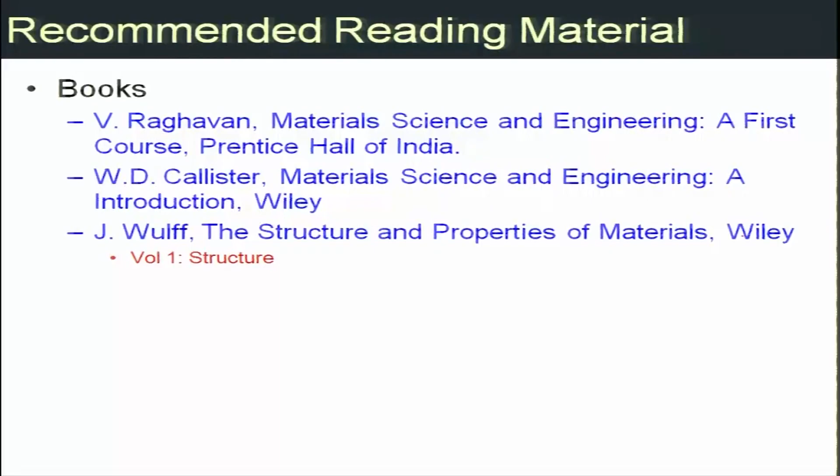It is a very old book, perhaps not available very frequently, but the first volume is related to the structure of materials. It is a very good book if somebody wants to get into a little bit of detail.

Let us see why all of us know that materials are very important. Our civilizations are named after materials, and in the development of humankind, materials have played a very important role, which is why we have ages like the Bronze Age, Stone Age, Iron Age, and so on.

Currently we have the Silicon Age or Electronics Age. So materials are very important; they have been important throughout the history of mankind. It is basically, you can say, the history of materials.

If you go back to our ancestors, they were earlier using stones, and then they started inventing materials. Strangely, precious metals came before many of the materials, followed by development of copper based alloys, various bronzes.

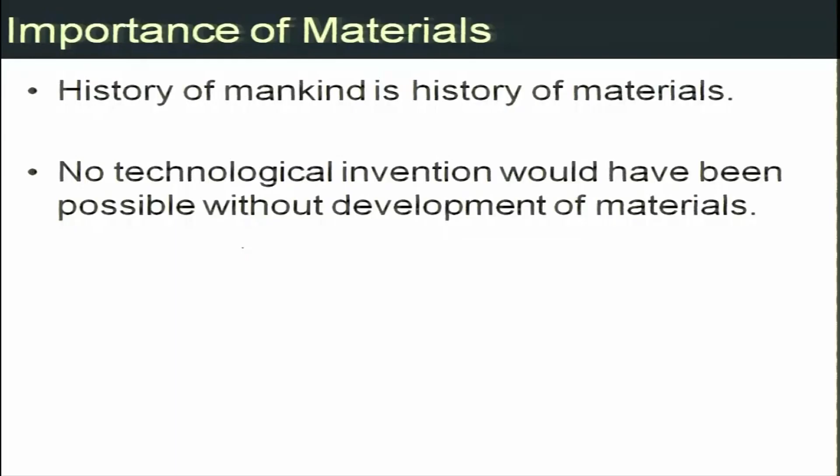If you go back to Indus Valley civilization, you see a lot of bronzes and brasses. And then, of course, the advent of iron gave rise to substantial advantages to human beings, because iron was a stronger material.

It could be used not only in warfare but a lot of other practical things. It made hunting easier as compared to stones and other objects.

If we come closer to our times, since the past 200 years or so, the advent of electronics or electricity has led to new developments.

Materials based on, let's say, the electronic age, silicon based materials, because of which we are utilizing all the devices which are basically silicon based.

As we stand now, perhaps no technological invention would have been possible—all the gadgets, all the technologies, all the healthcare devices, all the automotive devices that we have.

They probably would not have been possible without concurrent development of materials. So materials in that sense are very important for us, and that is why it is important to study the science and engineering of materials.

In this course, which is an introductory course, we will talk about the basics of materials, which will help you advance further in this discipline.

So, if you look at the historical perspective, going back to 10,000 BC, man was using things like stone, straw, brick, wood, and skins.

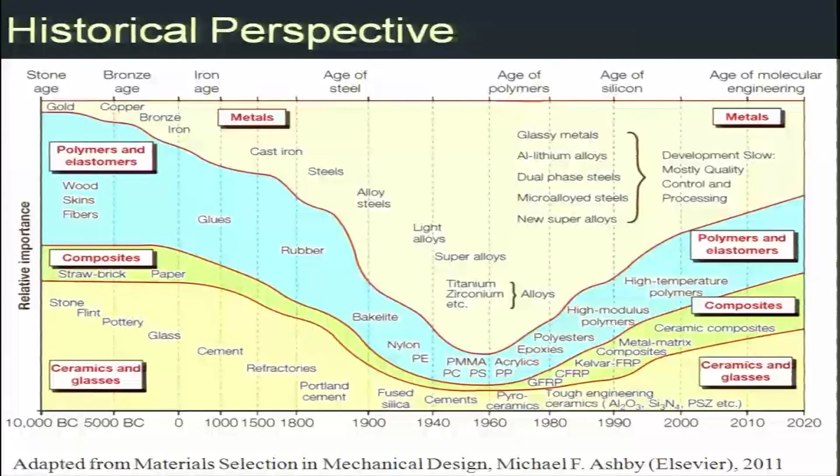So if we classify these materials, which are used in most engineering applications, there are a few categories. The first one that comes to mind is metals and alloys. Copper, for example, is a metal, nickel is a metal, brass is an alloy of copper and zinc.

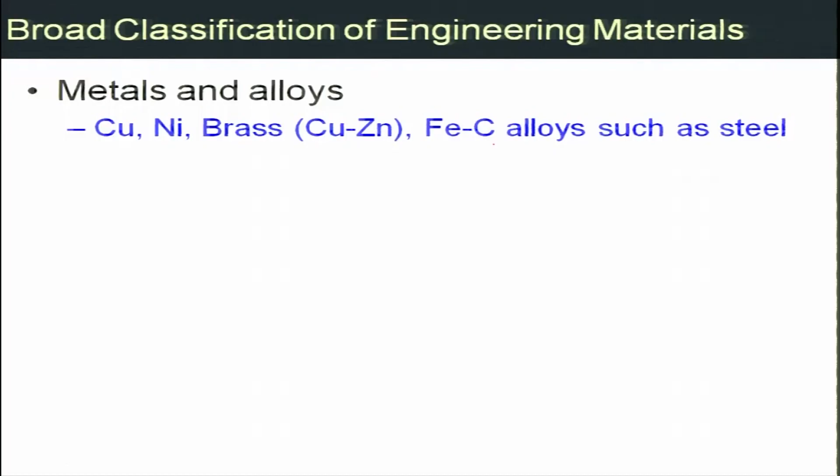You can have iron-carbon alloys, which are nothing but steel and cast irons. So anything like copper, nickel, brass, bronze, iron alloys, zirconium, titanium, aluminum, all of them are metals, and you can make alloys of them by mixing with various elements, giving them very good properties. Metals typically are very ductile, reasonably strong, and can be used in applications from low temperature to high temperature.

They are very ductile, so you can make them easily into different shapes. These are some characteristics, and they are also electrically and thermally conducting. That's why metals are used extensively in our world.

The second category of materials is ceramics and glasses. Examples of ceramics are aluminum oxide, silicon carbide, magnesium oxide, titanium oxide. All these oxides, nitrides and carbides happen to be ceramics, and they are different from metals because they are much more brittle, but they are also very strong, with high strength or high modulus.

But they are also very brittle, so they cannot absorb shock. If you subject them to impact loading, like if you drink tea from a glass cup, you know that if it breaks, it shatters, whereas a metal does not do that, which means it is brittle.

But there are certain applications where ceramics are important, because they are high temperature materials and also have low coefficient of thermal expansion. So things like refractories, bricks and kilns use ceramics extensively. Cutting tools also use ceramics because they have high hardness.

Metals, on the other hand, are typically used as structural materials, as bridges, houses, rods, automobiles, anything which has to be strong, ductile and tough - you use a metal, depending upon the temperature and strength that you require.

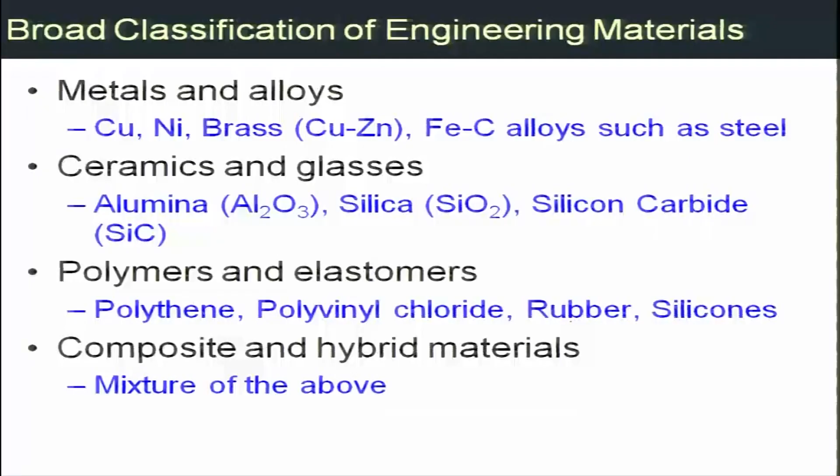The fourth class of materials is called composite and hybrid materials, which is basically a mixture of the above. You can mix a metal and a ceramic to make a metal matrix composite, utilizing the properties of both. Similarly, you can make a polymer matrix composite by mixing polymer and ceramics, using the advantages of both, and you can mix polymer and metal as well. So a combination of two or three classes of these different materials gives you composites, and they have their own advantages.

For example, tennis rackets today are basically composites, as are many parts in automotive or aircraft applications. Wherever you require high specific strength or high specific modulus, you predominantly tend to use polymer composites, because composites have high strength per unit weight. Similarly, they have high modulus per unit weight, and that is useful in certain applications.

These are certain applications you can see. This plier for holding things has a head made of metal. It's made of metal because it has to be strong, it shouldn't be brittle, but it should provide a good grip and not yield. So it's typically made of steel, but there are a lot of other applications of metals. You use them for making bridges, as a construction material, and a lot of parts in cars are made of metals like steel, aluminum, and copper.

Ceramics, you can see that white ceramic piece here, this is basically an insulator. Ceramics are insulators, so they insulate parts of, let's say, a spark plug. Ceramics are also thermal and electrical insulators, providing insulation from thermal and electrical effects. For example, on electrical poles you see white ceramic pieces, which are nothing but ceramic insulators.

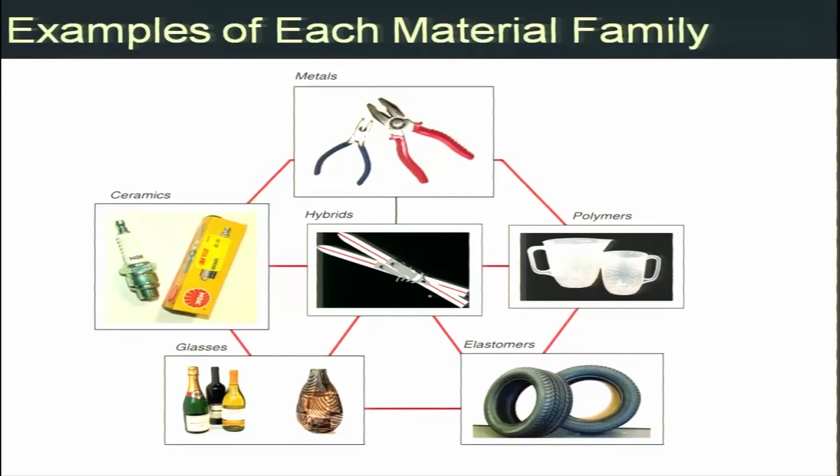If we go to the next slide, these are certain applications as I explained before. So ceramics, just to summarize, have high stiffness, high elastic modulus, they are hard, have high abrasion resistance, and good high temperature strength, meaning they hold their strength up to higher temperatures, typically above 1000 degrees centigrade. They have reasonably good corrosion resistance, but they are brittle - this is a major problem with ceramics because they cannot absorb any shock.

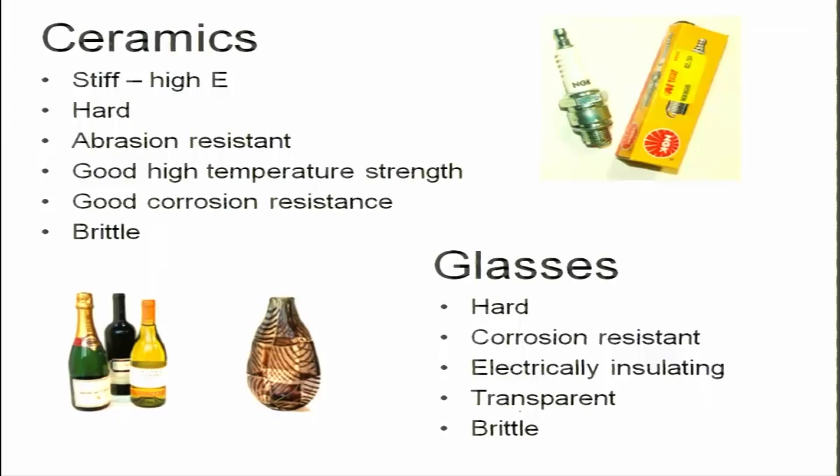Glasses, on the other hand, are hard, corrosion resistant, electrically insulating, and transparent. These are some good attributes of glasses, very similar to what you have in ceramics, but they are also brittle. So this is again a problem with glass.

Polymers have low density, they are light because they are made of light elements like carbon, nitrogen, oxygen, and hydrogen. They can be easily shaped by processes like molding, etc. They have high strength per unit weight. So as such their strength is not very high, but if you look at it in the perspective of density, they are very strong. They lack stiffness, which means they have low elastic modulus, but they are very flexible.

You can make plastics work to large strains, so they can withstand large strains. But their properties are highly sensitive to temperature because they soften with temperature, their melting points are lower. So plastics are typically not used for applications wherever you have to subject a material to high temperature. Plastics are typically suitable for temperatures lower than 50 or 100 degrees centigrade, depending upon the type of polymer.

Elastomer, a cousin of polymers, again lacks stiffness, it has low modulus, several times lower than metals - basically rubber. It has this wonderful ability to retain its shape after being stretched, and you can provide very large strains to a rubber or elastomer, and they are relatively strong and tough as compared to polymer. They are used for things like tires and similar applications, wherever you require a stronger polymer you use elastomer.

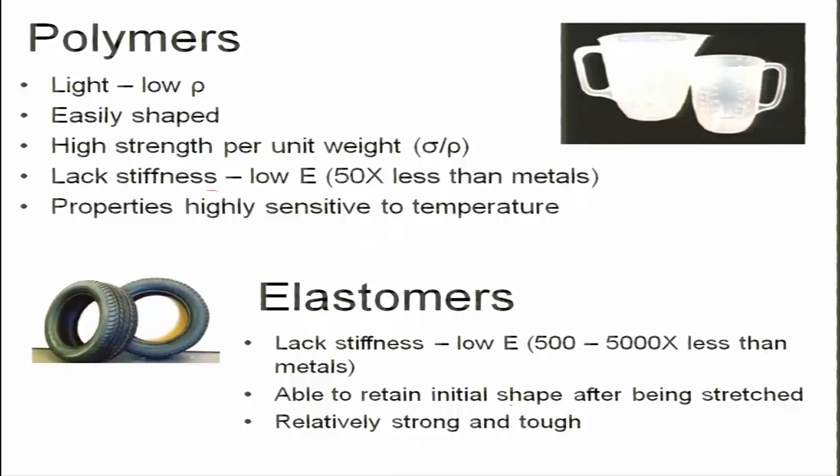One difference between polymer and elastomer is polymers can be melted and reused. Elastomer cannot be melted - if you melt them, they decompose. So typically an elastomer decomposes, whereas a polymer does not decompose.

And then we come to metals and hybrids. Metals are very tough, they have high fracture toughness. This is a parameter called KIC, which is a representative of fracture toughness, which we will probably see later in some other course. They have high stiffness, high elastic modulus, and they are very ductile.

Depending upon the composition, processing, what the metal is made of - whether it is iron based, aluminum based, copper based, or nickel based - they can give you strengths which are highly varying. You can achieve strengths from 50 megapascal to 1000 megapascal, even higher, depending upon composition and processing. So it is very good to have a metal because you can engineer its property depending upon what you want, which can be varied by changing the composition and processing conditions.

They are typically thermally and electrically conductive, which is why they are used in applications wherever you require high electrical conductivity and high thermal conductivity. However, most metals are reactive - they tend to oxidize or react with the environment, and that is why most metals have low corrosion resistance. So wherever the atmosphere is aggressive in nature - acids, alkaline environments, sludges, sewers - you cannot make components out of metal because they will corrode as a function of time. This is a drawback of metal.

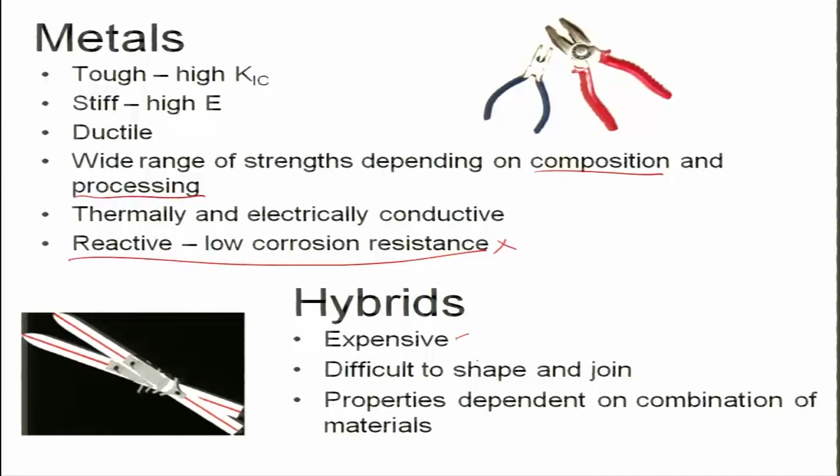And then we have hybrids, which tend to be expensive because you have to process them in a specific manner by mixing different classes of materials. Since you use different materials, they are not very easy to shape and join, because metals have different joining characteristics, ceramics have different joining characteristics, polymers have different joining characteristics, and they are all processed at different temperatures. As a result, it is very difficult to make a good shape out of a composite and to join them, so processing is a little difficult in case of hybrids.

However, you can achieve very good properties depending upon the combination of materials. For example, a tennis racket - what do you require in tennis? It should be light, it should be strong, and it should not yield. When the racket hits, it should flex a little bit without deforming permanently or breaking. That is achieved by making a composite, let us say carbon-carbon composite or polymer-carbon composite. Depending upon what you mix, how you mix it, and the kind of shape and size of materials used, you can tailor their properties extensively.

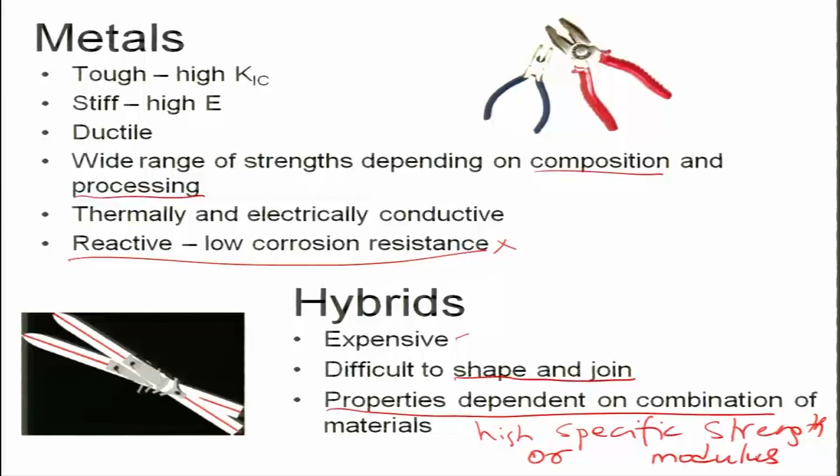So they typically give you high specific strength or modulus, which is required basically in automotive and aircraft applications. So these are certain examples of materials.

Now let us look at what makes materials important, or how can you engineer them. This is called the materials tetrahedron, which consists of 4 parts.

One is the structure of materials, and this is what this particular lecture series is all about, structure. But structure is a very wide connotation. There are various meanings of structure, which I'll tell you a little later.

Second is properties. Properties could be mechanical property, thermal property, electronic property, optical property, various properties. Third is processing. How do you make a material? How do you process a material to bring it to a particular shape and size that you want?

Then performance, which is related to the applications you are looking for. For example, applications could be structural like bridges, electronic applications like the gadgets you carry, mobile phones, display or LED, or transportation like train or car, refractory applications like furnaces, or space applications. We are sending spaceships to space.

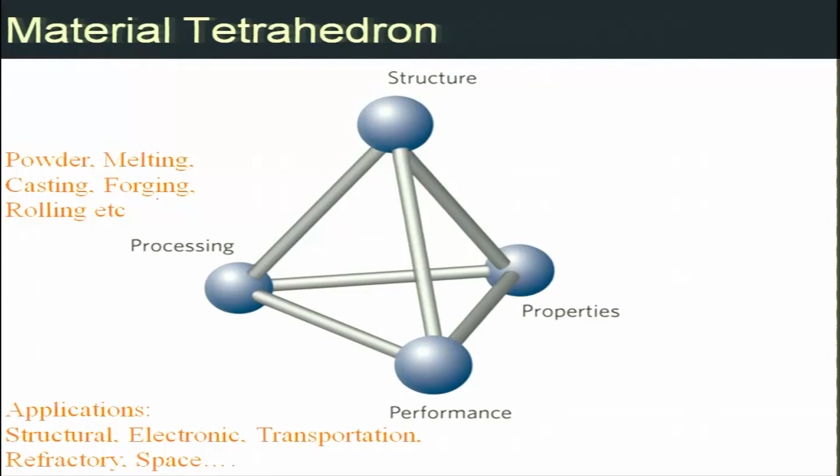And then we have properties, which could be mechanical property, electrical property, magnetic property, thermal property. The question is how to measure them or how to tailor them. And then we have structure at the end.

Structure of a material is looked at various scales. One is the macro structure, like looking at a tree. If you cut a tree, you see something with the naked eye, okay, that is macro structure. If you want to look at it in more detail, to see how different layers are, whether there is any porosity or any crack not visible with the naked eye, you look at the microstructure under the microscope.

And if you want to understand the structure even better, then you have to go to the atomic structure, which means you have to use very fine techniques and do some modeling as well. And if you want to understand even further the properties which emanate in a material, then you look at the electronic structure, which is typically a modeling based exercise.

So structure of a material depends upon the length scale you are talking about. It could be macro structure, microstructure, atomic structure, or electronic structure. You can see the length scales decrease as you go from macro to micro to atomic to electronic.

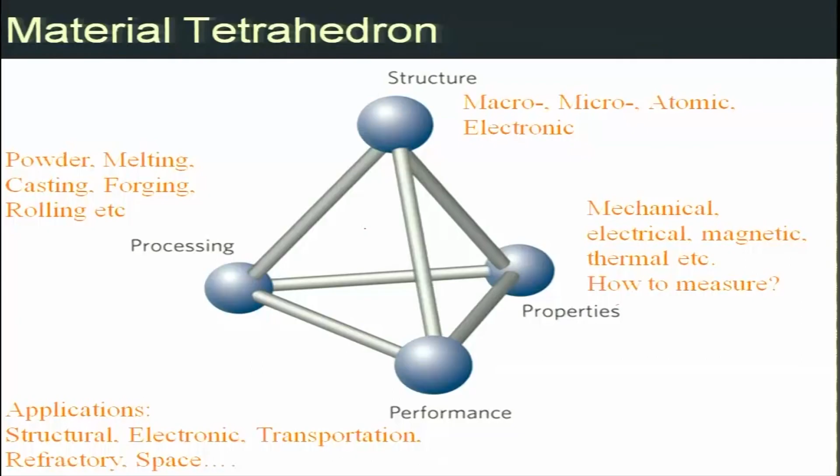It is the combination of these 4 attributes of materials—structure, processing, performance and properties—which determine the potential of a material. For a given application, you need to optimize the properties and the process. The process has to be simple, cheap and easy to make. Properties should be according to the application, and properties are affected by structure. Structure is affected by processing. All of these things are connected to each other, and that is why it's very important to understand this materials tetrahedron. If you have any questions in between, you can ask.

So this is basically an early summary of the content that we are talking about. Materials evolution, as we saw, is concomitant or synchronous with the development of humans. We could not probably have developed any of the technologies that we use today without the successive development of new and new materials.

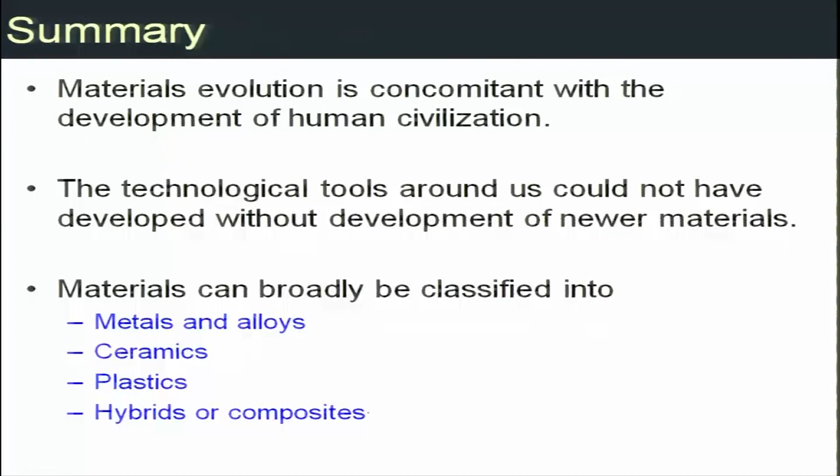Today, with the understanding of science, physics and chemistry, we are able to classify materials into various classes: metals and alloys, ceramics, plastics, polymers and elastomers in that category, and hybrids or composites. Now the question is, what is the difference between these four, and why should we categorize materials in these four categories? The very basic reason is properties, but there is something more fundamental, and that origin lies basically in the bonding of these materials, how they are bonded.

So what I will do is give you a brief introduction to the bonding of materials before we look into the structure of materials, because bonding is what determines the structure. So before we move on to the discussion on bonding, I will show you how the structure of materials is important, at various length scales.

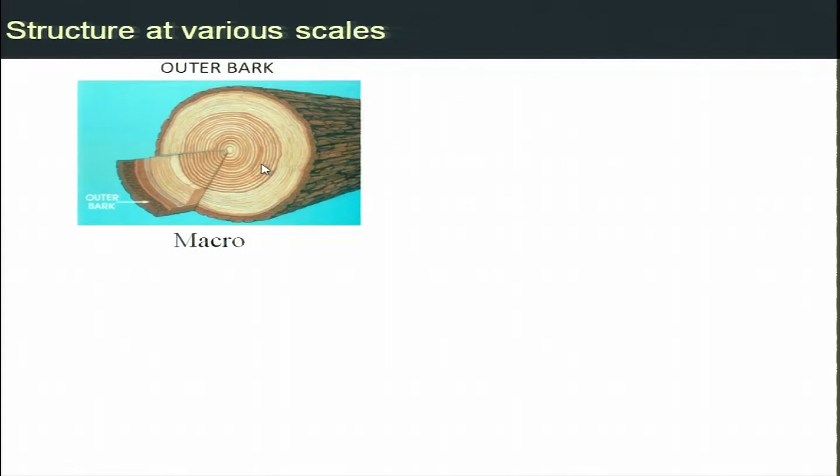If you look at a tree, for example, this is the cross section of a tree. You can see these rings in the bark. This is something visible with the naked eye, so this is called a macro structure, meaning length scales beyond the resolution of the eye—anything bigger than, for example, a hair, which is a few microns in size.

If you want to look into details, you need to magnify it, so you put the material into a microscope—an optical microscope or a scanning electron microscope, which can help you resolve things down to microns and few hundred nanometers. Here you can see, for example, fibers or pores aligned in a certain fashion, not visible by naked eye because of the length scale.

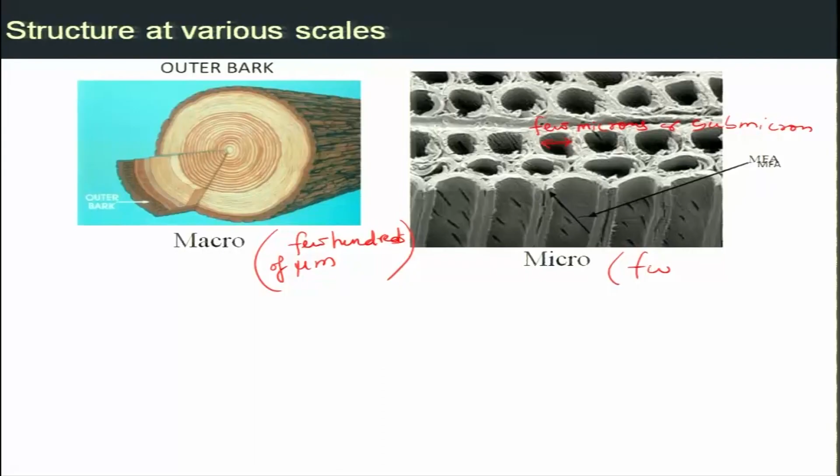This length scale could be a few microns or submicron, not resolvable by eye. More than a few hundred micrometers, you call it macro. Micro would be, loosely, a few nanometers to a few microns—this is basically the microstructure level.

So this is naked eye, and this is optical or scanning electron microscope. And then we have a third category.

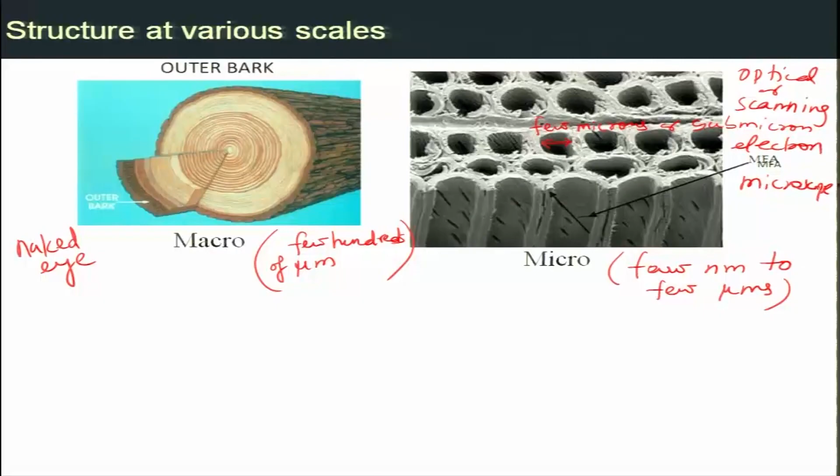If you really want higher levels of detail, you can look at the structure of a material at the nanoscale, or atomic level. Here is a transmission electron microscope image of a material, where you can resolve things down to 0.5 nanometer; the scale bar shown is about 10 nanometers. So this is called nano or atomic structure, and by careful imaging you can also look at the atomic arrangement in a material.

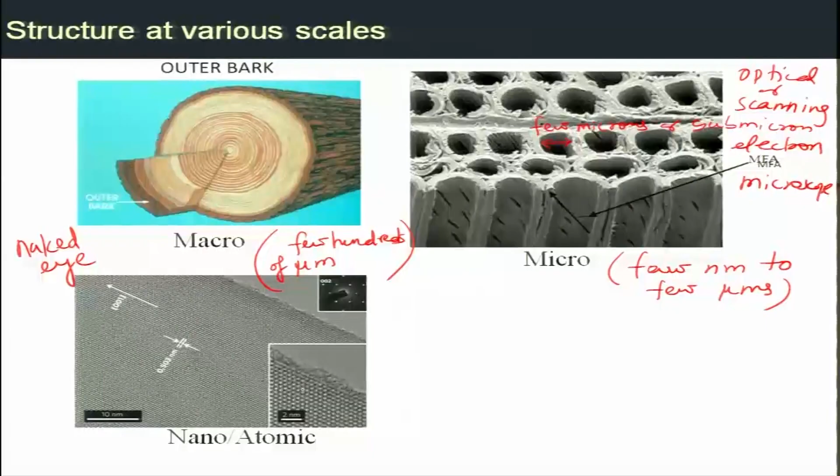If you want to understand this even better, you need to do atomic simulations, which tell you about the atomic structure of materials, going further to the electronic level. This is done by TEM, typically resolving down to less than a micron, down to about half a nanometer. Below that you cannot do microscopy—you need to do simulations or modeling.

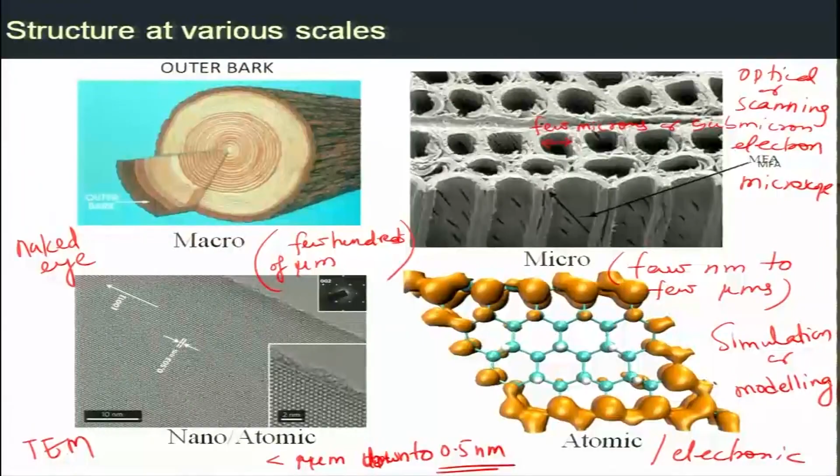So these are the four levels of structure present in a material, and it is very important to understand them, because how the structures are made, the distribution of various things, their size, morphology, and orientation, will determine the properties of a material, and those properties determine the applicability for a particular application. This structure is controlled by processing, which is why I showed you the tetrahedron earlier, which is very important.

In the next lecture, we will first talk about the bonding of materials, just to have an idea of what bonding is and how it relates to the classification of materials we discussed, and then move on to studying structures, starting from the smallest scale first and going to the largest scale later on. Thank you.